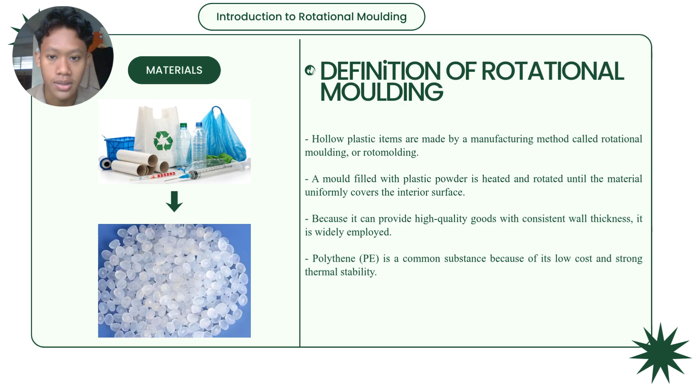For the rotational molding process, it has four processes. Number one is loading. Loading is where a precise weight of polymer powder or liquid resin is loaded into a hollow cold metal mold. The two or more pieces of the mold are securely clamped shut to prevent material leakage. Secondly is heating. The loaded mold enters a large heating oven, and then the mold begins to rotate simultaneously on two perpendicular axes. And as the mold gets hot, the plastic powder melts and coats the internal walls evenly.

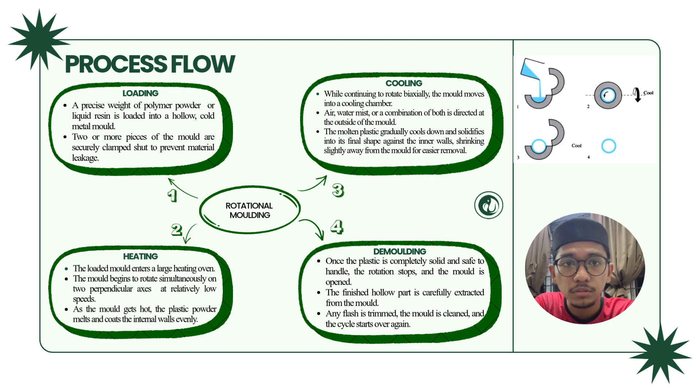The third one is cooling. While continuing to rotate biaxially, the mold moves into a cooling chamber. Air, water mist or a combination of both is directed at the outside of the mold, and the molten plastic gradually cools down and solidifies into its final shape against the inner walls, shrinking slightly away from the mold for easier removal. And lastly, demolding. Once the plastic is completely solid and safe to handle, the rotation stops and the mold is opened. The finished hollow part is carefully extracted from the mold, any flash is trimmed, the mold is cleaned, and the cycle starts over again.

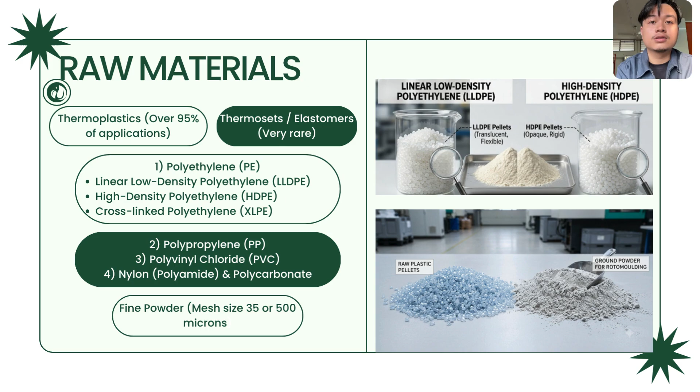If you look at the pictures on the right, raw plastic usually comes as small pellets. You can easily see the difference between LLDPE, which is clear and flexible, and HDPE, which is solid, white, and stiff. But for processes like rotomolding, regular pellets won't work. They have to be ground down into fine powder like you see in the bottom picture. We need a specific mesh size of 35 or 500 microns, so the plastic melts evenly and gives us a perfect finish.

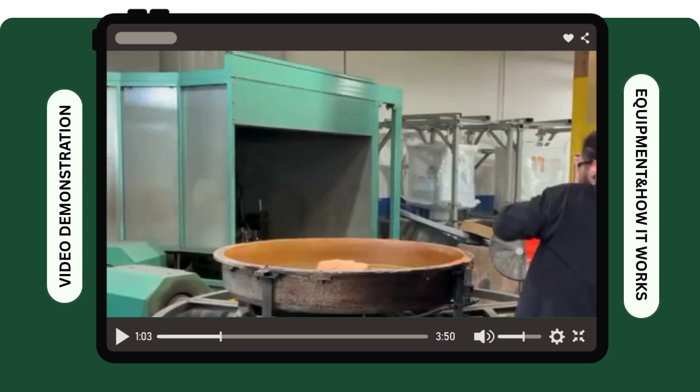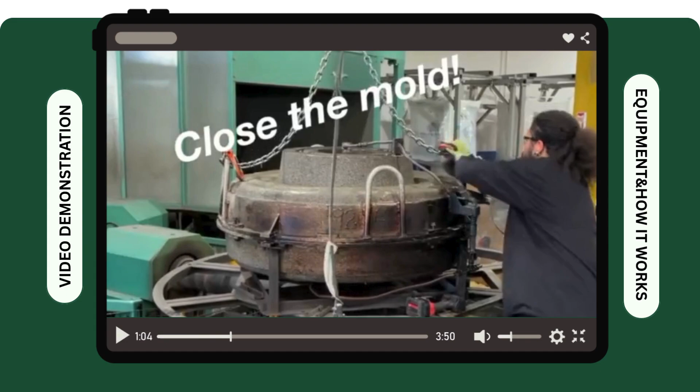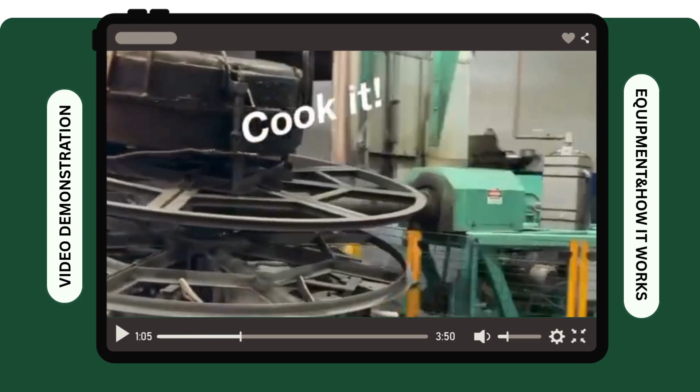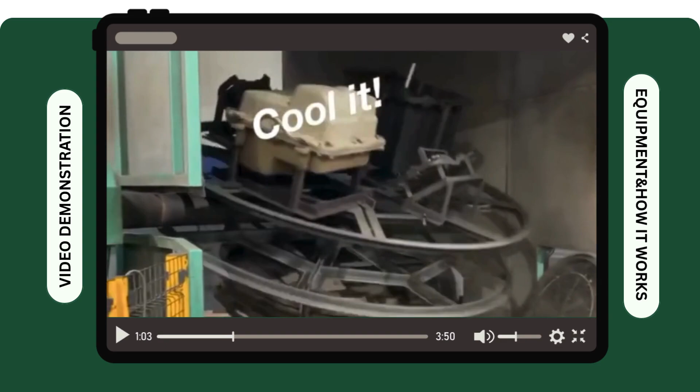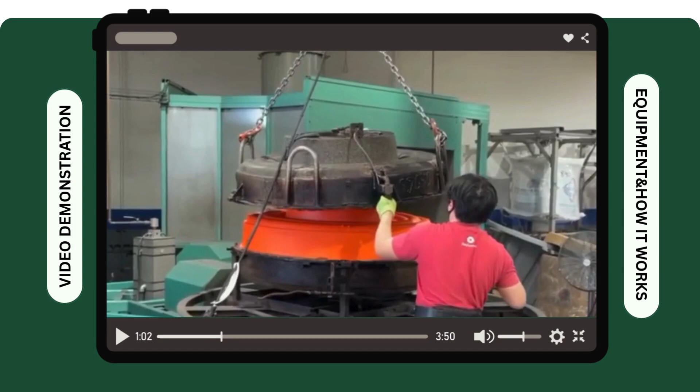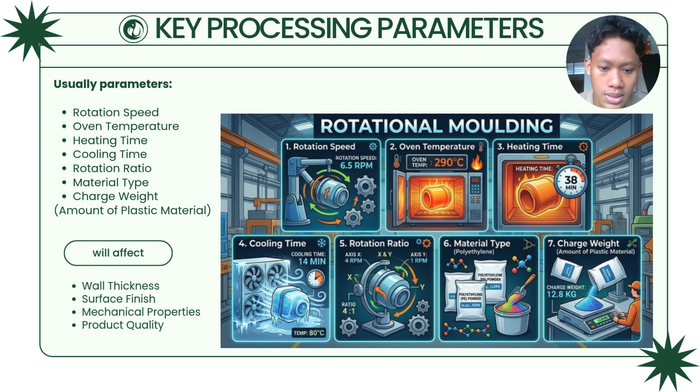Now we are at the key processing parameters that engineers usually detect and control: rotational speed, oven temperature, heating time, cooling time, rotation ratio, material type, and last but not least, charge weight, the amount of plastic material. These parameters will affect four factors, which are wall thickness, surface finish, mechanical properties, and product quality.

Alright, so the example products for rotational molding. There are three example products of rotational molding. The first one is kayaks or canoes. Next is industrial chemical waste, and the last one is the water storage tank.

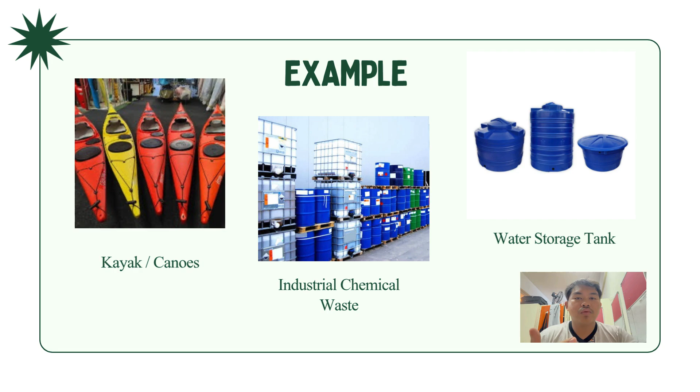So next, proceed to the advantages and disadvantages of rotational molding. For the advantages, rotational molding is ideal for making hollow items like tanks, containers, and toys without needing to join parts. Another advantage is uniform wall thickness, no seams or weak joints, it can create complex shapes, and low material waste. As for the disadvantages, rotational molding takes a longer production time because the heating and cooling process takes time, so production is slower compared to other methods.

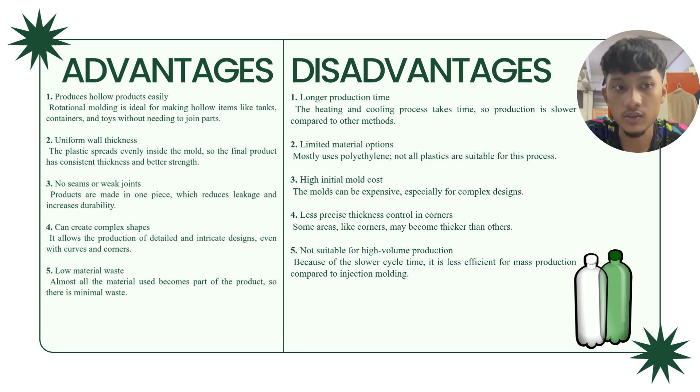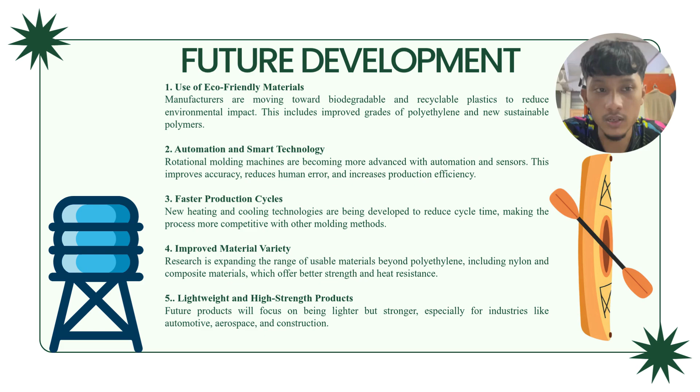Another disadvantage of rotational molding is limited material options, high initial mold cost, less precise thickness control in corners, and not suitable for high volume production. And then the future development of rotational molding is the use of eco-friendly materials, automation and smart technology, faster production cycles, improved material variety, and lightweight and high strength products.